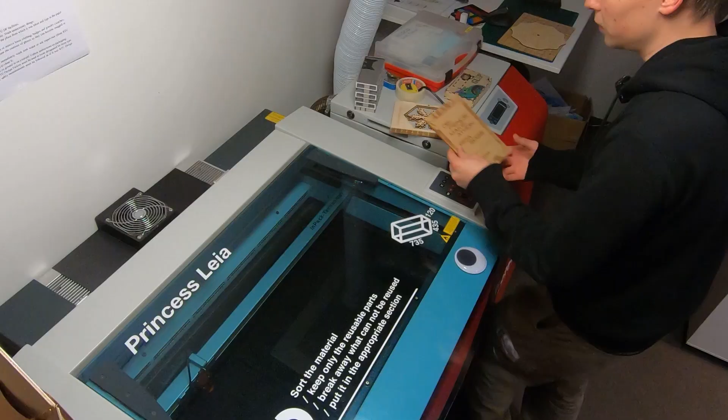So, what can you laser cut with this laser cutter? You can cut a square, then engrave something on it, or cut something out like this, or even make living hinges like this, or make a battle bot. This is my one, I made this one.

The art as well, that's not engraved, that's just paint. But yeah, you can make battle bots that can be smashed around and see, still perfectly all right.

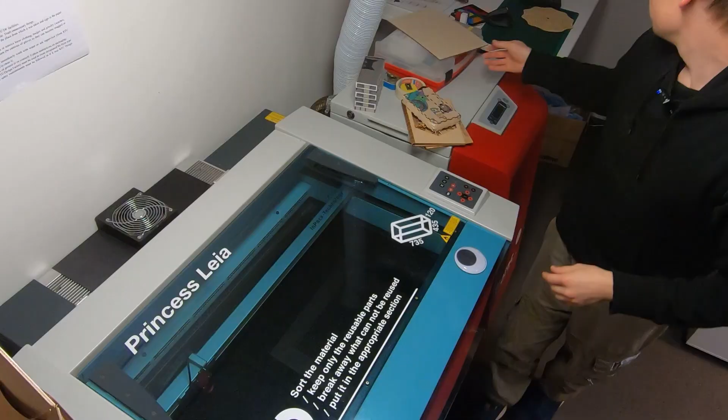And you can go even further, you can make puzzles over here. This one is glued together with tape on the back, like this. Then we can also make not only living hinges, but hinges by themselves. This is supposed to be a tree, a pine tree, it has a star.

And you can even make bigger things with the laser cutter, like one of our interns has done. He has made a Minecraft pig. I crashed it, but there, see? Minecraft pig, like this. It's quite big, quite heavy, but it's made from the same stuff that we use here, 6mm plywood. This thing is made from the same thing, only bigger sheets. But yeah, it can be opened, can be fixed, has wheels. Currently it's not turned on, otherwise I'm gonna crash way worse. Let's put it back down over here.

But yeah, you can make big things, small things, very precise things with the laser cutter. So this is going to be a crash course on how to use it. Not abuse it, how to use it.

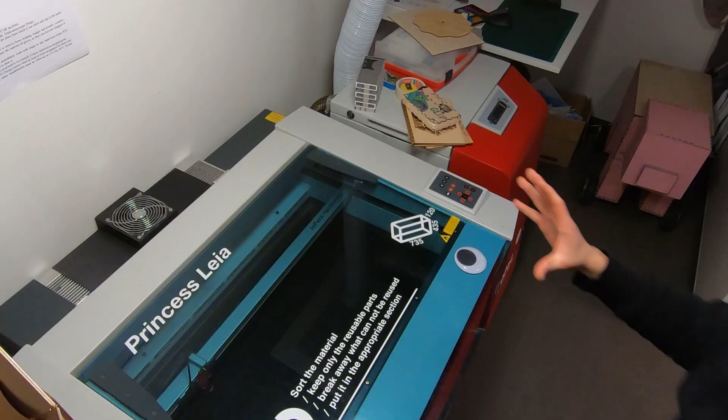So why should you be choosing the laser cutter instead of a 3D printer? This thing prints plastic, this thing can cut plastic as well. But what is better than a 3D printer is that 3D printers are slow, very slow. When you move the bed, when it prints layer by layer, it is slow. The laser cutter is fast. For example, if I would be cutting out this small box, it would take 3-4 hours, okay, maybe on faster printers maybe 2 hours to print. But over here in the laser cutter, it only takes a few minutes.

This one, to be exact, 4 minutes of cutting. Plywood, you cut it, and then I think this can be also, yeah, this can be somehow glued. It's glued? No, it's good, can be disassembled like this. So it's basically plywood cut into pieces, glued together, and it's quite fine.

It's very nice. So a laser cutter can also cut small things, like tiny pieces of plastic over here, if you look at them, same as this. You can cut very precise things, for example these snowflakes are supposed to be broken off. See, already broken off the piece, but it's still held in place.

So laser cutters, in a nutshell, are much faster than anything, but limited to 2D surfaces. It can engrave some 3D surfaces, for example we have a rotary attachment to rotate mugs and engrave them. If you cannot really cut anything like that, we cannot cut a mug, it's made out of porcelain or some clay, it cannot be cut. But it can be engraved.

But the laser cutter is mostly for 2D things. Later you can assemble them into 3D things. There are many things that are assembled layer by layer and then joined together. You can have some 3D things like this, same as this tree.

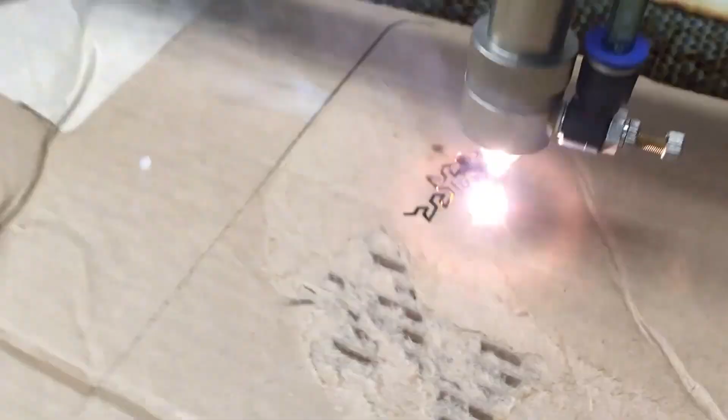Paper and cardboard - in most common cases, students will bring their own paper and cardboard. They come in different colors, sizes, and thicknesses. Currently almost all kinds of cardboard have their settings already set up on the laser cutter, but it's always recommended to cut out a small piece to test if the material cuts through evenly. Both paper and cardboard cut beautifully, but they are highly flammable, so use low power and keep a close eye on it to avoid flare-ups. Corrugated cardboard can catch fire in under 6 seconds because of the great airflow that the corrugated layers allow, and in rare cases the cardboard can burn from inside out, creating a big dark spot, so be really careful when cutting cardboard materials.

Cork, the same material used for corks in bottles - they also come in sheets, and it cuts nicely with the laser. It's natural, safe, and gives great results for coasters or inlays, but the sheets may be badly warped, so be sure to tape them down as necessary. Organic leathers: real, untreated leather is safe to cut. Just make sure it's vegetable tanned, not chrome tanned or synthetic - that stuff releases nasty chemicals. When leather is cut it also smells like burnt meat, so it's not suggested to be cut in large quantities.

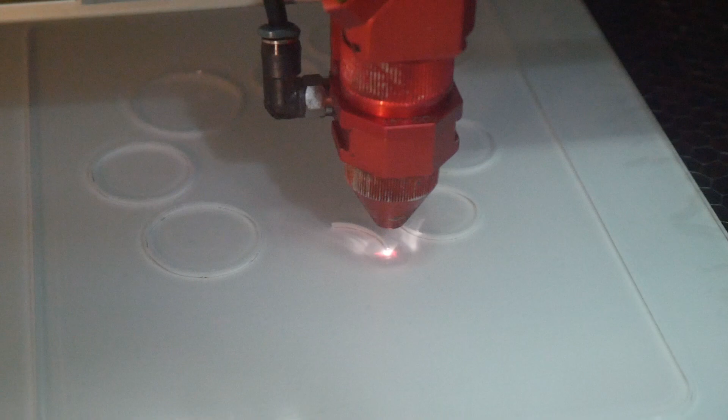Acrylic, or so-called plexiglass - people call it different things, but you have to remember the real name: polymethyl methacrylate, in short form PMMA. This material is also stocked in the lab, ranging in sizes from 2, 3, 4, 5, 6, and 8 millimeters. Sometimes you might even find 10 or 12 millimeter ones. Plexiglass, remember PMMA, is also one of the best plastics for laser cutting. It cuts very cleanly, polishes the edges as it goes, and smells a bit like sweet plastic. Avoid other plastics that look similar though - they might not be safe.

Some natural fabrics are also laser cuttable - for example silk, cotton, felt, and wool are fine, just keep the power low to prevent charring. But synthetic fabrics like polyester or nylon can melt or give off toxic fumes - avoid those. And then polypropylene: it's one of the few plastics that is reasonably safe to cut. It tends to melt a bit, but it doesn't release toxic fumes like ABS or PVC. Other safe materials include wood veneer, MDF without exterior glue, natural rubber, and Delrin. These are generally fine in small amounts, but ventilation is always important.

Now we have reached the do-not-cut material list. Exterior plywood - as shown in previous clips, exterior plywood burns and doesn't even cut through. It contains weatherproof glues and resins that give off toxic gases. Don't risk it. This is one of the most misunderstood materials by the students - be aware of this, and you must tell them apart. If the student says the material has been brought from Home Depot or some other mysterious place, it's probably non-cuttable exterior plywood.

PVC, or polyvinyl chloride - absolutely not cuttable. As its name suggests, it contains chloride, which releases chlorine gas when cut. This gas is corrosive, toxic, and destroys the laser cutter's optics and electronics, and your lungs. This material should never ever be cut.

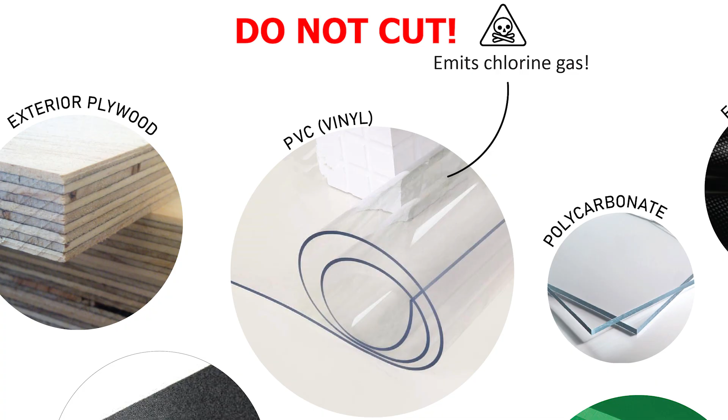Polycarbonate, or PC. It looks like acrylic or plexiglass, but behaves totally different. It burns, discolors, and releases toxic fumes. It also barely cuts through. It is one of the most misunderstood materials by students. Always check the origin and markings on material brought by students. If you're not sure, suggest using our material, and be sure to ask the staff's opinion, or tell the student that the material cannot be cut.

Epoxies, fiberglass, and carbon fiber composites - these materials are resin-based and full of glass or carbon fibers. Cutting these will release fine dust and extremely toxic fumes. Never use them in the laser.

ABS - you probably know what's ABS, Legos are made out of it. In long form, acrylonitrile butadiene styrene, this is another no-go material. It melts instead of vaporizing and outgasses hydrogen cyanide, which is highly poisonous. Never cut this material.

HDPE, high-density polyethylene. This material just melts into a gooey mess and can catch fire. It is not worth the trouble.

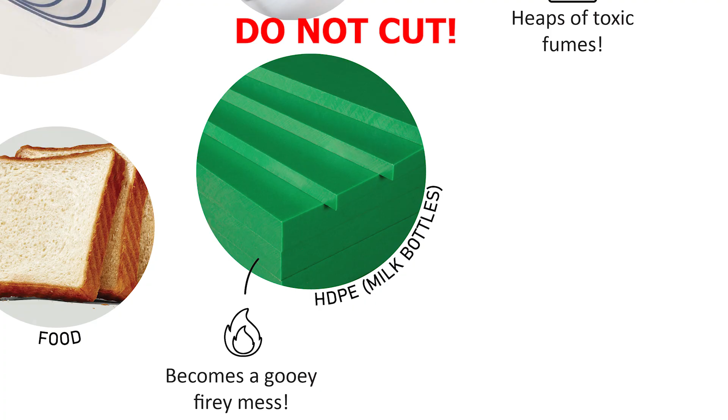Food - even though food is non-toxic, do not cut food. A laser cutter is not meant to have food even near it.

Vinyls and fake leathers - they usually contain PVC, meaning chlorine gas again. Dangerous for you and the laser cutter.

Painted or coated woods and metals - the coating can contain lead, chromium, or other toxic compounds that become airborne when burned. Yes, the filter filters almost everything out, but what remains on the material as dust stays there, so there's still a possibility of inhalation. It's not worth the risk.

Teflon, or PTFE, and other fluoropolymers - when these materials are cut, they release toxic fluorine compounds. They are super dangerous.

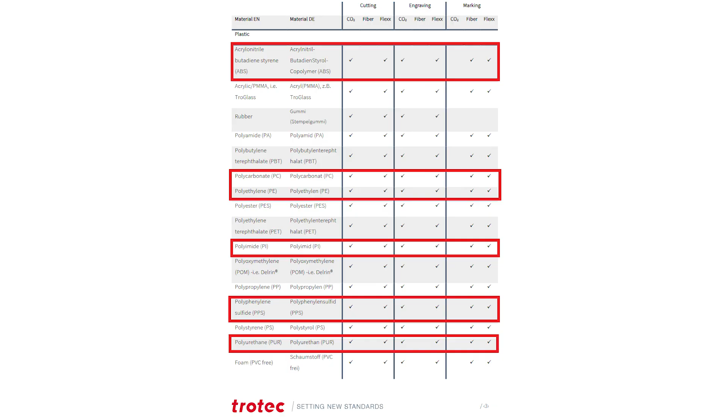A quick rule of thumb: if you're not sure what the material is made out of, do not cut it. Always check the manufacturer's datasheet, and even then, don't believe that it should be cut. For example, when making this guide, I found out that the laser cutter manufacturer's website advertises that the laser cutter can cut some of these dangerous materials.

But in real life, not only will they poison you, they will also corrode the metal inside the laser cutter. When you're not sure and being pushed by students to test out a material, be sure to ask the lab staff for their opinion, or don't cut the material. Nothing bad happens when you don't cut the material, so suggest using one of our materials kept in stock. Yes, students might get angry, because sometimes the store clerk where they bought the material tells them it can be cut. Yes, of course it can be cut, but in reality it will poison not only you, but the people around you and the students themselves.

So always be aware of the materials that you or others are cutting. Alright, remember to stay safe, and let's move on to how to actually operate the machine.

The laser cutter assembly consists of four main things: the pre-filter, which we are currently not using, the laser assembly itself, the actual filter, which we are using, and the computer system.

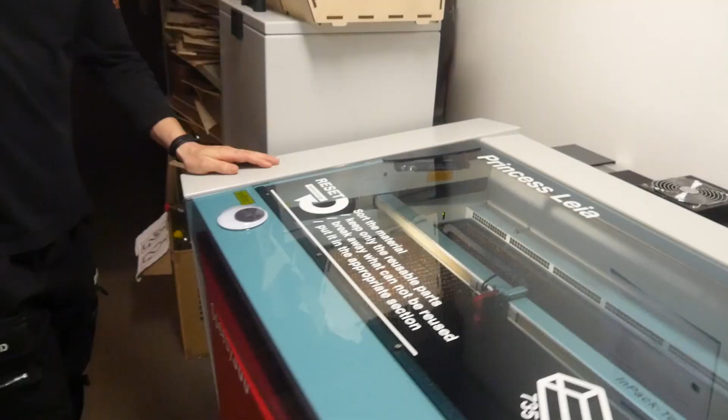To turn on the laser cutting system, first find the power button, located on the back of the laser. You don't have to reach very far, it's right over here, can you see it? Yes. To turn it on, just flip the switch. The laser cutting assembly will turn on and calibrate itself - it levels the bed, and then levels the laser gantry itself.

After a few beeps, as you can hear, the laser cutter is ready to start working. It has calibrated all the zero positions of the bed and the head. The work can be started.

When the laser cutter is turned on, you can manually control it by the physical control menu found here. There are many buttons, I'll explain each one of them.

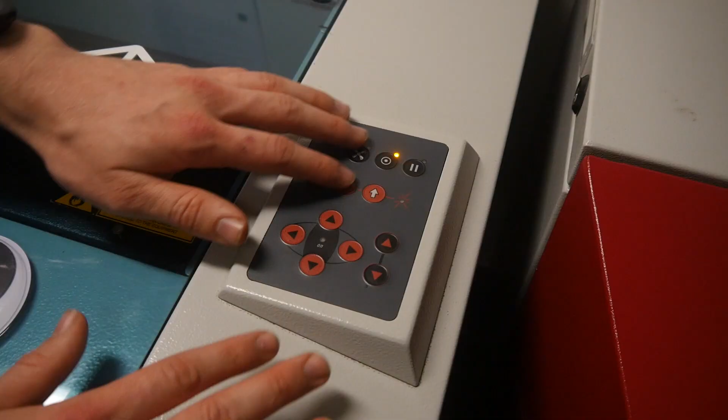Over here, the main button that's currently yellow controls the wake and sleep state of the laser. Currently the button is on, meaning the laser is in sleep mode. If I press it, it wakes up the laser, and when I press it again, it puts the laser back to sleep. If this button is turned on, all of the other controls do not work because the laser is in sleep state. Over here, this button is a manual button for the filter.

If you press it, the filter is going to wake up. If I press it manually, the filter wakes up, and if I press it again, the filter goes back to sleep. We don't really use this button because the filter automatically turns on when you launch the job. It's only here to check the filter manually if you want to.

To the right, you can see the pause button. This button is used to pause the job. If you're doing something and need to adjust something, press the pause button and the job will pause. Then you can adjust anything you want, and when you press it again, it will continue the job.

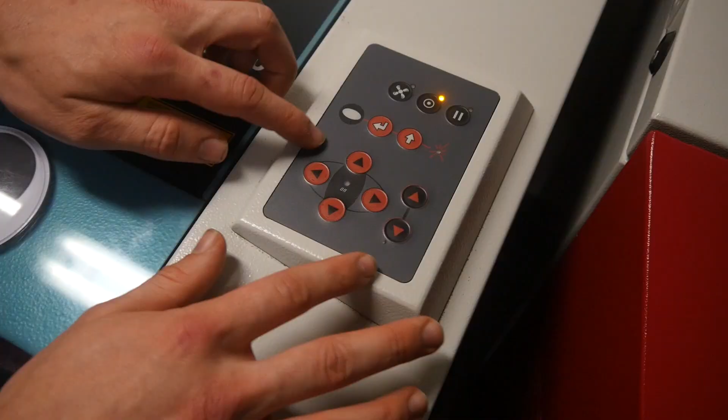Over here, on the lower side, you can see the main control buttons for the laser assembly itself, to manually move it. If I wake up the laser, you can see these red buttons control the laser head. I'm going to move it down, to the right, back up. These buttons move the laser head.

The buttons on the side control the bed. This button, if you press it, the bed goes up. If you press the down button, the laser bed will go down. Currently I'm just moving it up. As you can see, it's slowly moving up.

I'm going to move the laser here. So, back to sleep, back to sleep. See, the laser goes back to sleep.

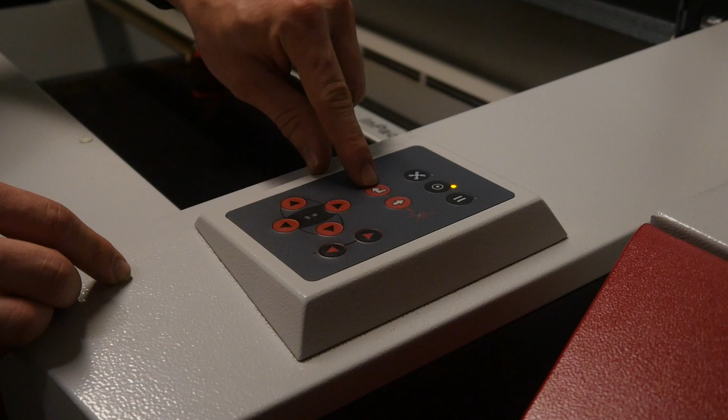These buttons are the shortcut buttons. This button represents the enter button. If you press this button, it will launch the job that is on the computer. We don't use this button because we always make sure we launch the job from the computer, but this button can be used as a repeat button. For example, if a job doesn't cut through it all, you can use this button to launch the job a second time.

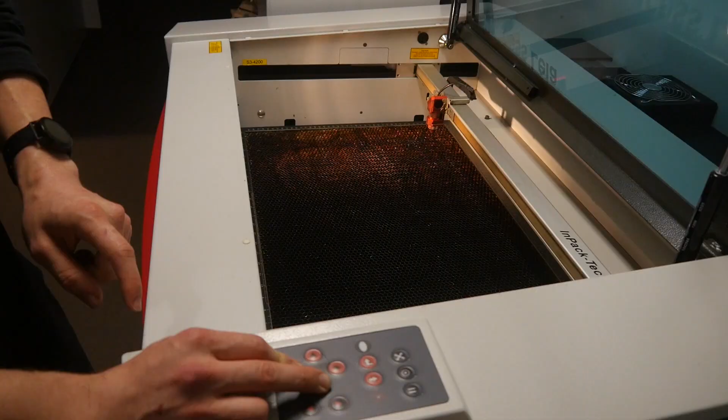This button represents the arrow up, and it works like a shift button. If you press this button, the laser assembly will go really fast to whichever side button you have pressed. For example, I'm going to hold the shift button and move it to the side. See? It's really fast. If I move it manually, it's quite slow.

For example, if I'd like to take the laser head from here to that corner, and I press these two buttons together, see, it's really quite slow. Let's go back. For example, if I want to go really fast and don't want to hold these buttons for a long time, I press the shift button, then press these buttons. As you can see, the laser goes back to place.

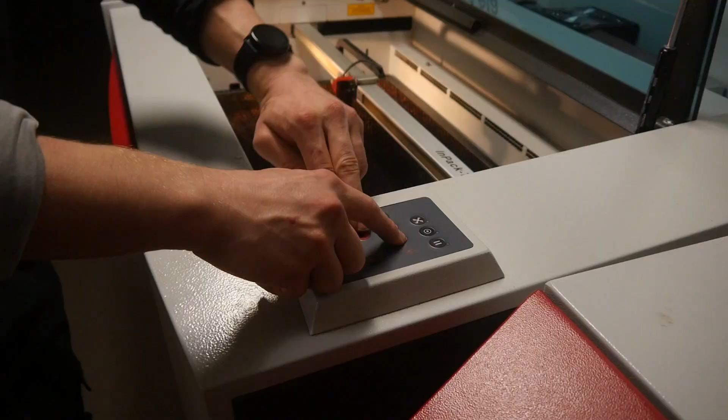I can do the same thing for this side. It goes like this, and then it goes back. The buttons can be pressed simultaneously to move it diagonally, but you can also use them one by one to control the laser assembly. Let's send it back to its place. And now it's back to sleep.

This is the laser control menu.

Before starting your job with the laser cutter, you must obligatorily check three things: the laser lens, the laser mirror, and the laser filter. Over here, I'm going to turn on the laser, move the head to the middle position, and turn it off.

Over here you can see the laser head assembly. Here is housed the mirror. Here is housed the lens. Here is housed the pressurized air that blows down this nozzle to blow away the smoke. And here is the groove for the calibration tool. That's the whole laser head.

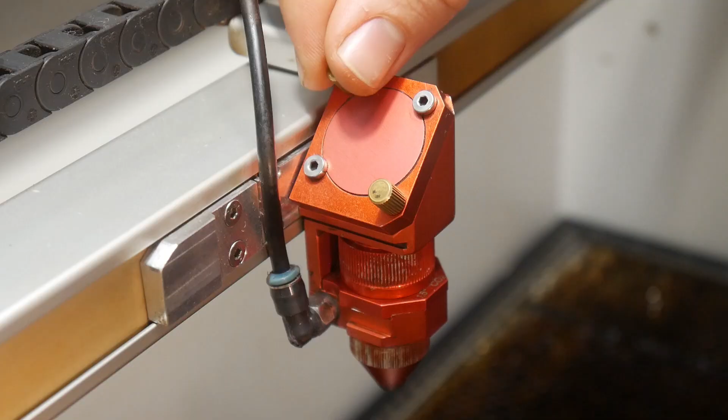To remove the mirror itself, first you have to remove these two screws. You have to unscrew them anti-clockwise. Do not lose these screws. Store them in a safe place.

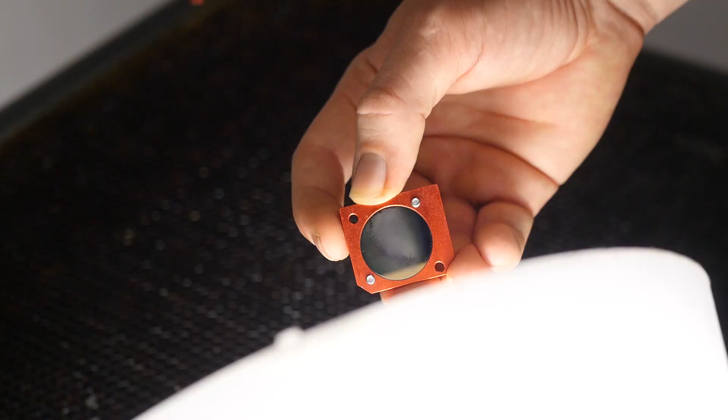Over here, be really careful not to drop the laser mirror. You can just take it out once the screws are unscrewed. I'm going to place it here. Over here, if you can see, it's a little bit cloudy. I'm going to place it here.

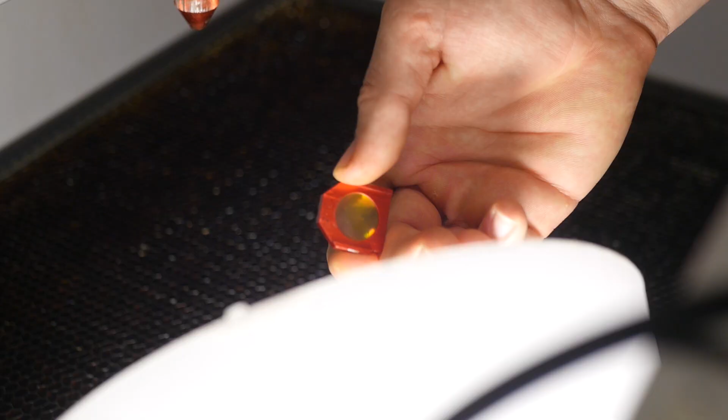Then, over here is housed the laser lens. To unscrew it, there's a big screw over here, and it's unscrewed anti-clockwise. So unscrew it, and then it can be slid out. If you can see, it's also pretty dirty, very cloudy, and not see-through. You can see the cloudiness on the lens, like here.

Place them over here. To clean the laser lens and the mirror, you have to use this toolbox, stored over here on the laser filter. Sometimes it's in a different spot, but we store it here on the laser filter to make sure it's in one place, and we all know it's over here.

So you'll need two things from this box: lens tissues and lens cleaner liquid over here. First, remove the lens tissues from the protective bag so no dust gets in there.

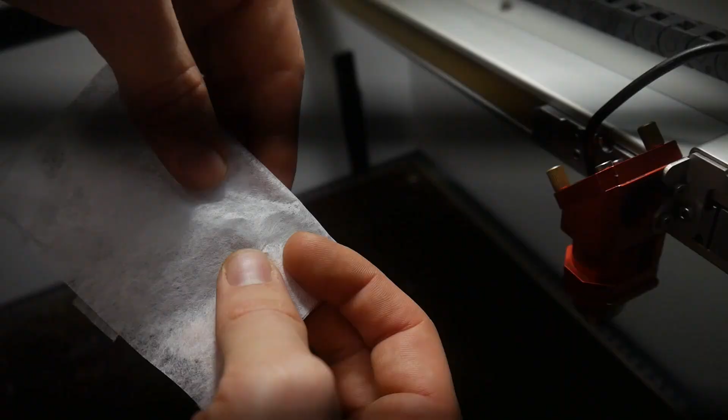Here are the lens tissues and the lens cleaner. First, you have to prepare the lens tissues. Open the package and tear off one piece of lens tissue. Then fold it 3 times: 1, 2, and 3. It has been folded 3 times.

Using the lens cleaner liquid, put 2 drops on the mirror, 2 drops on the mirror. Close the lid, put it away, and then swirl it around. You can see the liquid swirling around, very nice.

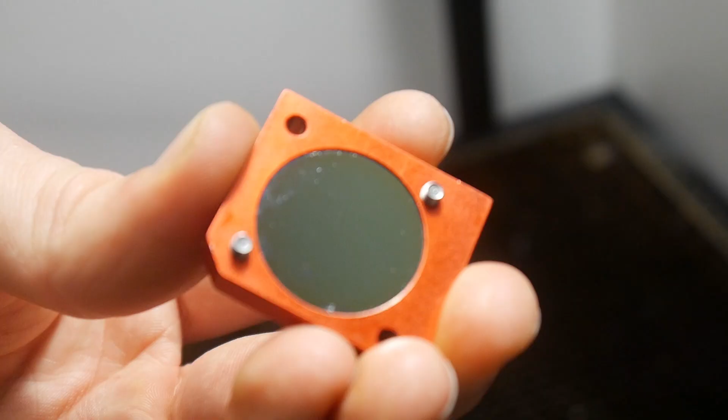Then, taking the tissue, put it on top, rotate the whole mirror 1 full rotation, and press down and wipe away. As you can see, the liquid quickly evaporates and now it's very clean. Looking here, the mirror is like a mirror, no cloudiness in there. There are a few scratches, but that's just fine. You have to make sure there is no cloudy film on it. Now it's very clean.

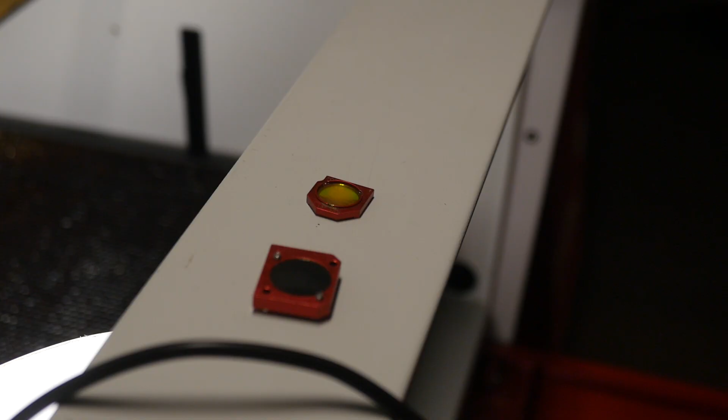Same with the lens, but the lens has 2 sides. Always, when you have used the lens tissue, throw it away. We do not reuse them. So each side will get a new tissue.

So again, taking the tissue, folding it 1, 2, 3 times, taking the lens cleaner, 2 drops on the lens, closing it, and again be really careful not to drop it. Then press it on, rotate it 1 full rotation, pressing a little bit, and wipe away. As you can see, the lens top is now quite clean. But we still have the other side, which is again cloudy.

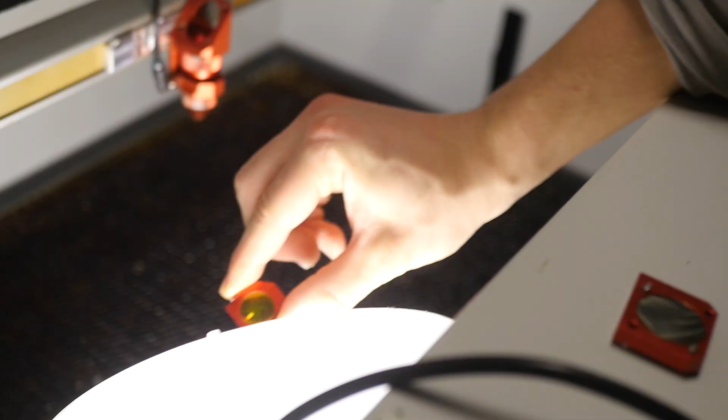So again, throw this away, use a new sheet, tear off a new sheet, fold it 3 times: 1, 2, 3. Again, 2 drops on the other side, 1, 2. Close it. Then really carefully swirl it around so the liquid gets in all places. Put it on, rotate it, pressing it slightly, and then wipe slowly away. As you can see, it is now very, very clean.

So both sides, you have to make sure that the lens and the mirror are clean. So let's put them back the same way.

As you can see, on the lens it's written 'top' with an arrow indicating this way, and you can see the corners are cut off here, same as on here. You can put it in, slide it in, make sure not to touch the lens itself, and slide it in, then this can be rotated clockwise to lock it into place.

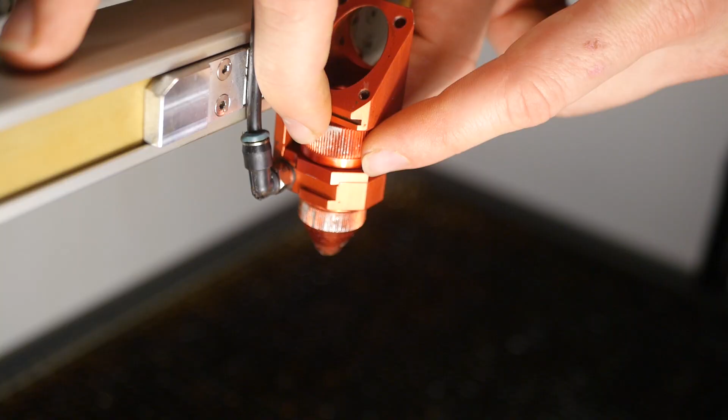Make sure not to over tighten. You can already see some people have used pliers to open it because someone had over tightened it. You have to just tighten it finger tight, so you can easily untighten it. But not too easy, you have to apply a little bit of force to untighten it, so apply also a little bit of force to tighten it. If you over tighten it, it will be impossible to remove. Please do not do that.

To check if it's tightened, put your finger and move it roughly. See, I opened it just with 1 finger, so it has to be put a little bit tighter. Now it's a little bit tighter, and now it's impossible to open with 1 finger. But if I use 2 fingers, I can open it quite easily. So just finger tight, make sure that it's not going to come off. Because if you tighten it a little bit loosely, this whole thing is going to be wiggly and can accidentally come out, and it will not give you a perfect result. So finger tight, same with the lens.

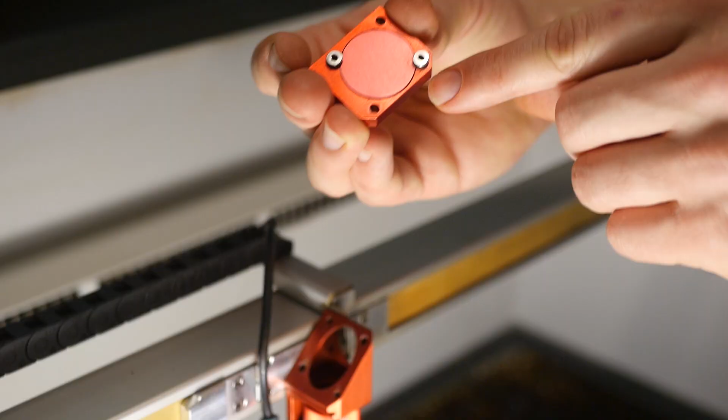Now same with the mirror. Be really careful, you don't have to slide this, you have to put it on. There's no written 'top', but the mirror goes down, and then you have to look at these 2 corners that are cut off. These are very sharp, but they're cut off. Same over here, also cut off corner, and then you can just put it on.

Remember, take the screws, screw in each place, and then you just tighten the screws. Again, make sure to do the finger test. If you cannot screw it with 1 finger, then it is good. Over here I'm going to untighten, see, with 1 finger putting quite pressure I can move it. So this is bad. You have to make sure they're finger tight and also can be opened, because do not over tighten these. So hand tighten, it will be perfect. If these are not tight, the whole mirror is going to shake and make a lot of artifacts on the laser cutting surface itself.

Okay, so the lens are cleaned. Let's go to the next thing, the filter, the third thing that has to be checked. Remember, after cleaning the lens, place the lens tissues back into the protective bag to protect it from dust and other debris.

Make sure that the lens cleaner is tightened to not spill accidentally in the box. After done, close the box and discard the used tissues.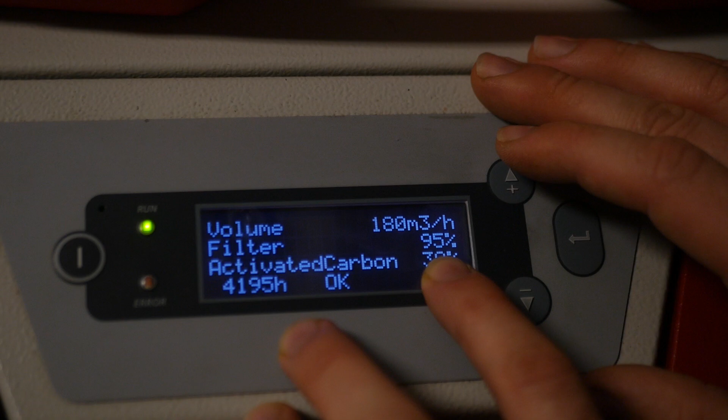After those two things are done, let's get to the third thing, checking the filter. If you go back to the laser control, we press the filter button and the filter turns on, and we can see the filter condition. If it goes up, see it's going up, going to about 93, 94%. It's even going up, and now it's going low, decreasing the speed. The bigger the percentage, the fuller the filter is. This filter has to be replaced quite early now because it's quite full.

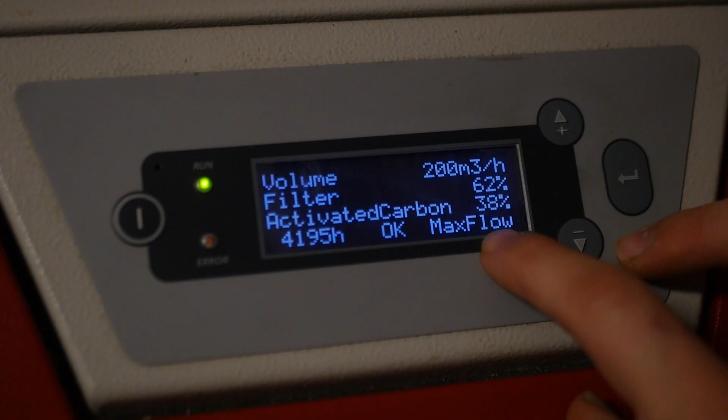If it's going to 100%, if you increase the airspeed like this, it might show 100%. That means the filter has to be changed. But now the filter is doing quite okay, so you just have to check the filter.

Please do not use these buttons, they're not used to mess with the filter. These plus and minus just change the air throughput of the filter itself. We don't really use them, we just have to set it at 100%, and it's just fine. We don't have to tune it unless something is wrong, then I'm going to mess around with these.

So, turning on the filter. The filter is okay, it's not beeping. The lenses are clean. We can get to the program.

So the laser has been turned on, the lenses, the mirror, and the filter have been checked, everything is in perfect condition. Now we have to turn on the computer.

The computer is usually in sleep mode, so you can just mess around with the keyboard and it will turn on. In this case, that doesn't turn it on, so it has been shut down. To turn on the computer, the power button can be found on the upper right corner here. There's a button hidden over here. Pressing the button will turn on the computer. Let's wait until the computer turns on.

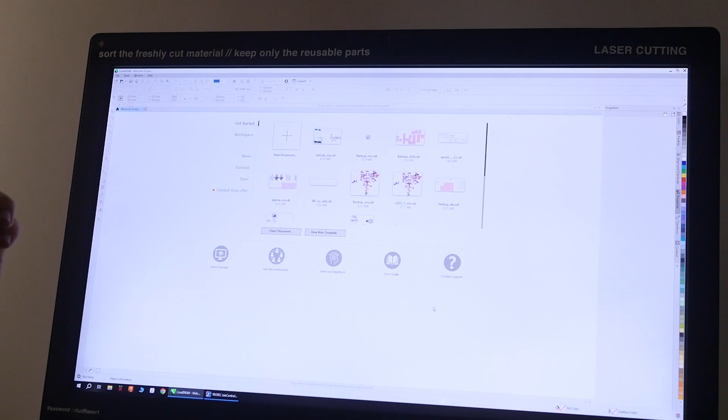Okay, see the laser bed. So the laser sizes can be found over here, we have printed them on the laser. Over here it's written 735 by 435, but in reality, usually you have to do it 730. There's a 5 millimeter difference.

CorelDraw and JobControl. When the CorelDraw program is open, on the Welcome screen under the Get Started tab, you can open an existing document or create a completely new blank one. For our laser cutter, the correct blank document settings are: primary color mode set to RGB, page dimensions left the same as the laser cutter's maximum bed size, and remember to keep the units in millimeters.

You can also do this by going to the top and pressing File, New Document, or Open and selecting your already existing document. If you're working on something important, remember to give your project a proper name and save it somewhere safe so nobody accidentally deletes it. Avoid saving files on the desktop, since it's frequently cleaned and things may disappear. Either create your own folder in the Documents tab, or save it to a flash drive, or use the cloud.

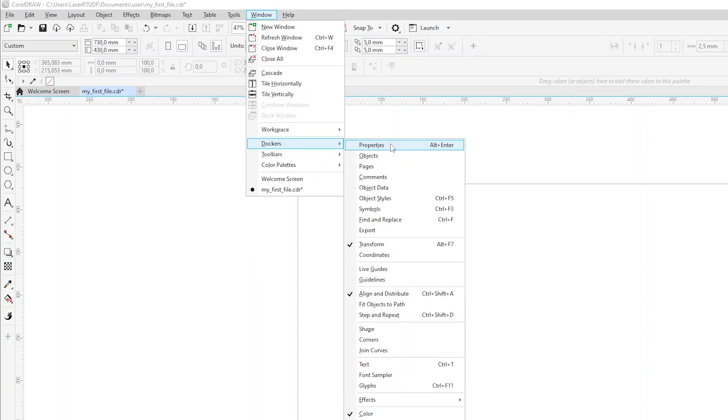On the top bar, you'll find options and properties for the current selected tool or object. On the right, you'll see various panels called dockers. The main one you're going to be using is Properties, where you'll find options for line color, line width, fill color, and texture. If any of the docker panels gets accidentally closed, you can reopen it from the top by pressing Window, Dockers, and then choosing the docker that was missing.

Working with objects. There are three types of objects in CorelDraw: vectors, images/bitmaps, and text or annotations. Let's start with vectors. You might be asking yourself, why vectors? Well, for any laser cutter, vectors are really important because they act as a coordinate system for the laser cutter, defining paths with exact units so the software and physical cuts match perfectly in size and accuracy.

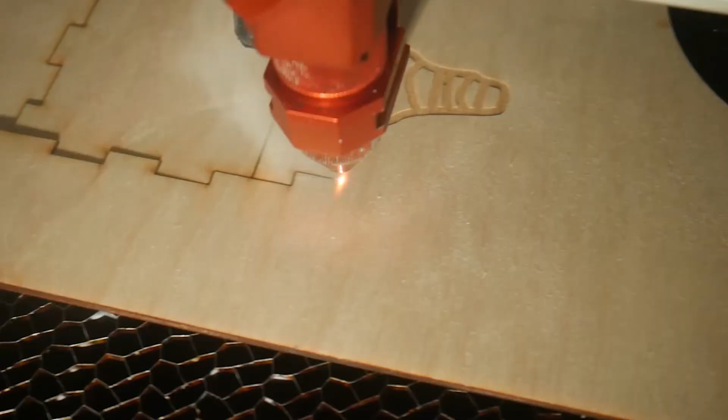Vector graphics are made up of points, lines, and curves defined by mathematical formulas. They can be scaled infinitely without losing quality. Most importantly, the laser cutter reads the vector paths directly. They tell it exactly what shapes and lines to cut out or engrave.

Drawing basic shapes. To start drawing, enable the freehand tool and draw by clicking and dragging. You can draw squiggly lines by holding down the left mouse button, and straight lines by clicking in different locations. You can also combine squiggly and straight lines.

Let's try drawing a light bulb. You can see that this tool leaves all of the detail and mistakes intact, and also that the line ends can be connected to different lines. Here's a very ugly light bulb.

The polyline tool lets you drop straight segments with single clicks, or draw freehand by holding down the click. Double-click or close the shape to finish your drawing.

For arcs, use the 3-point curve tool. Click and drag to define the base, then click again to set the arc.

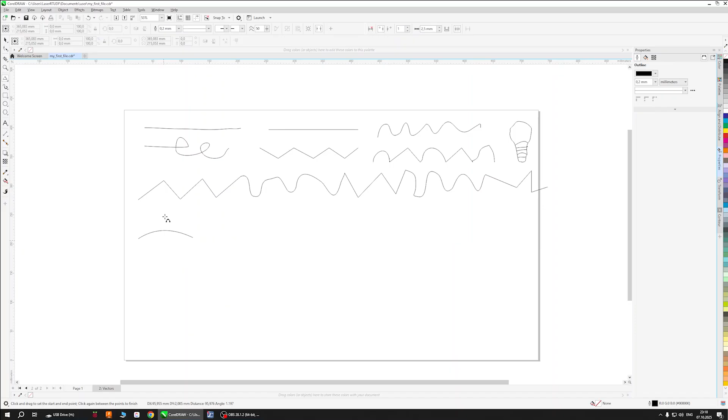For smoother curves, use the Bezier, Pen, or B-spline tools. With Bezier or Pen, click for straight lines, or click and hold to curve the line using the tangent handles. With B-spline, click to place the curve points, and double-click to finish.

To draw regular shapes like rectangles, circles, or polygons, use the tools between rectangle and polygon on the toolbar. You can draw uneven rectangles and ovals, but if you hold the Control button on the keyboard, you can draw perfect squares and circles.

For polygons and other shapes, you can set the number of edges you want in the Objects option menu found on the top. You can also use common shapes to select from preset forms.

The Artistic Media tool allows you to draw freeform sketches and adjust the stroke style, width, and other properties. Let's try to draw a cat and adjust some options. Seems like it's a little bit angry about my drawing skills.

You can also try Live Sketch or Smart Drawings to automatically smooth out your strokes.

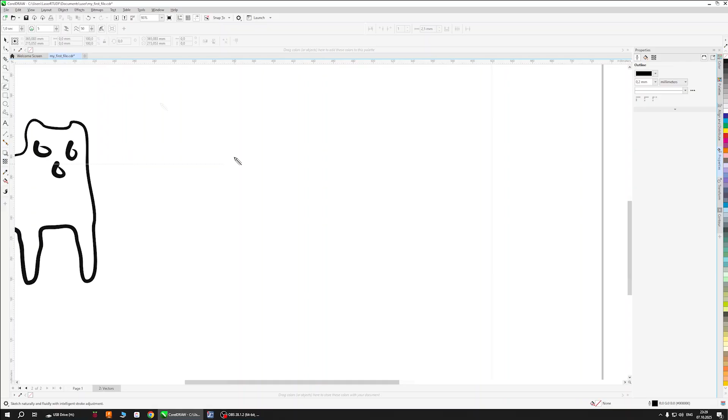Managing your drawings. To move or scale shapes, use the Pick tool and click on any object. You can drag to move, or use the black corner nodes to scale freely or enter exact values in the object size fields. You can also lock the aspect ratio to scale evenly or unlock to stretch in one dimension.

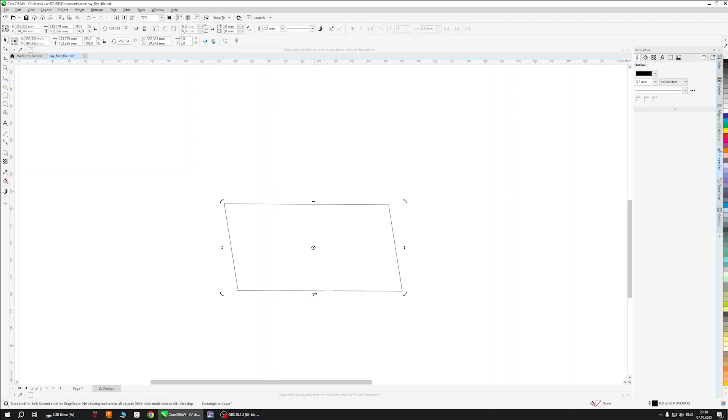Clicking on the same object again switches to rotate and skew mode. You can rotate using the corner handles or type an angle in the rotation box. If you want the object to be skewed, use the skew handles and drag them to skew the object. To rotate around a different point, drag the center crosshair to where you want the rotation to pivot.

You can also mirror the object horizontally or vertically. Using the Shape tool, you can smooth out the edges of your shape by dragging the corner nodes, or indent or bevel them using the top menu.

Drawing aids. CorelDraw provides rulers, grids, and guidelines to help you align different objects. Drag from the horizontal or the vertical ruler to drop a new guideline. Use the mouse wheel to zoom in and out.

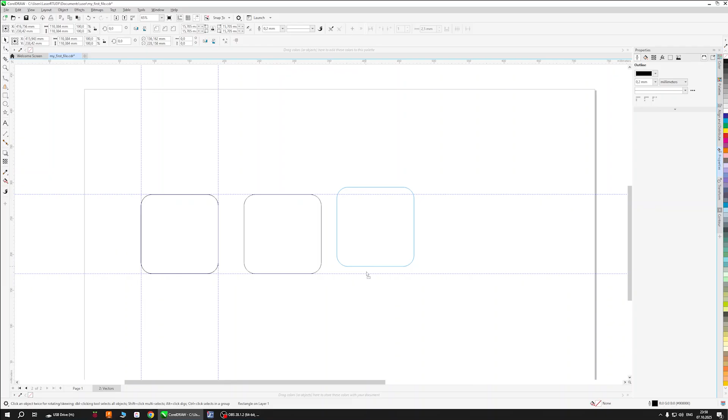You can also enable snapping from the Snap to menu. Snap to grid, guides, nodes, edges, midpoints, intersections, or centers.

A great way to practice vectors is to create a three-dimensional box with basic connections. You'll have to think how everything will fit together in real life when the thickness of the material is introduced. Let's try to draw this example, and in the process we'll learn some handy tricks with shapes.

With multiple different shapes and lines, you can combine them into a continuous line with the tools found at the top bar. You can see that the Weld tool combines the shape with the outer outline, but using the Trim tool I get the result that I was looking for.

I highly suggest testing the other tools to get the feel how each one can aid your drawing experience. Here I'll try to make the other linking side of the box piece.

Be sure to test out your drawings by snapping them together and looking for sides that may not fit or disrupt the connections. We can see that one of the sides will have to be modified to fit together.

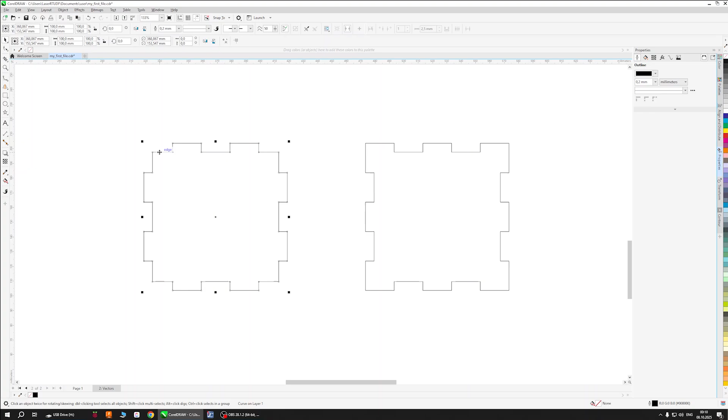To edit curves with the Shape tool, you'll have to check if the object is converted to curves. Simply right-click on the object and select the Convert to Curves option.

Now I will attempt to substitute one side of the wall to the second one, and see if the box fits together now. Seems like there's some more details to improve.

You can also use the Combine, Group, and Ungroup tools under the Object tab or with shortcuts. And of course, you can use Ctrl+Z to undo something. Now it's looking way better.

Let's try to copy and paste multiple ones so we can see how the box looks from all sides. I will also remove the top pieces to make a flush top. Alright, seems like all sides will fit nicely together.

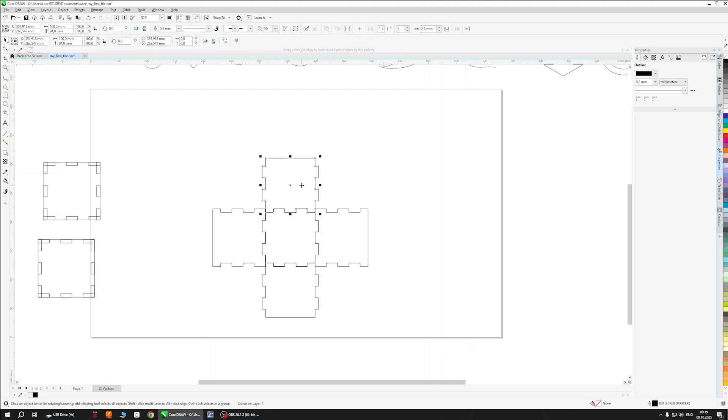Now, what's left is to prepare it for the laser cutter. Editing properties: to prepare your design for the laser cutter, open the Properties docker.

Under the Outline tab, you can set Line color to full red, in RGB values the red option 255, to set a true cut in the material.

Remember to set the line width option to hairline, otherwise the laser will engrave instead of cutting. Very important, the laser only reads pure RGB values. If you have any mixed or partial colors, it will be treated as grayscale and engraved instead of cutting.

Under the fill, you can apply colors, gradients, or patterns, but remember that it will be just engraved as an area.

Working with images. Images and bitmaps are made out of pixels and lose quality when scaled too much.

To import one, go to File, Import, and select your file, and click and drag to place it. You can move, resize, or rotate it with the Pick tool, and crop it or reshape it with the Shape tool.

You can also use the standard crop tool to crop the image normally. To convert an image into vectors, use the Trace Bitmap option.

This creates vector outlines based on the image. Simplify to as few colors as possible, ideally black and white.

You can also adjust the detail of the image, smoothing, corner smoothness, and some other options.

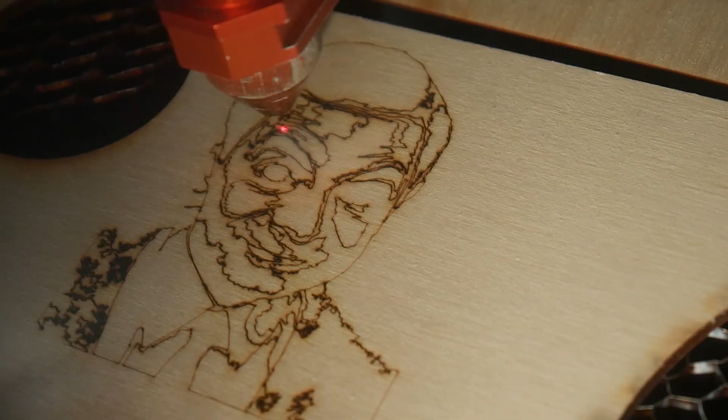Just remember, if you're surface cutting multiple lines together, or there are double lines that overlap each other, you can accidentally almost cut through the material.

The easiest thing to do is to take black and white images and then convert them to vectors. This will turn the low quality raster image into vectors and you can laser cut them out really easily.

Now let's try to recreate this black and white Mr. Bean. As previously mentioned, you should aim for the least amount of colors as possible, perfectly black and white. But in this case, I'm going to try to use some of the gray tones and then later delete them.

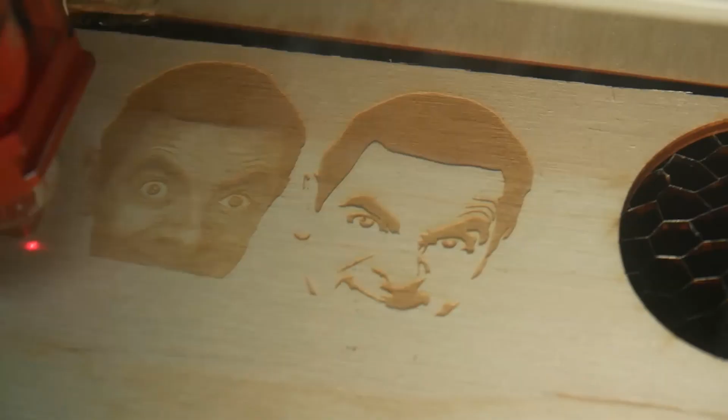Use the Text tool to create text boxes by clicking and dragging. If your text exceeds the box, the outline will turn red. Just resize the box to fix it. You can move, rotate, or skew text using the Pick tool.

Edit font, size, and color from the top bar in the Properties panel. To change text fill, background, or outline color, remember to have your text selected.

Be sure to test out all the things in the text options. There might be some things that might come in handy later. For example, text positioning, text fill type, text organization, all the possible sizes and styles, and of course, the color and the outline of the text.

You can also turn the text into curves using the right-click menu. Also, if you get annoyed by the text outer box, you can disable it by converting the text to artistic text.

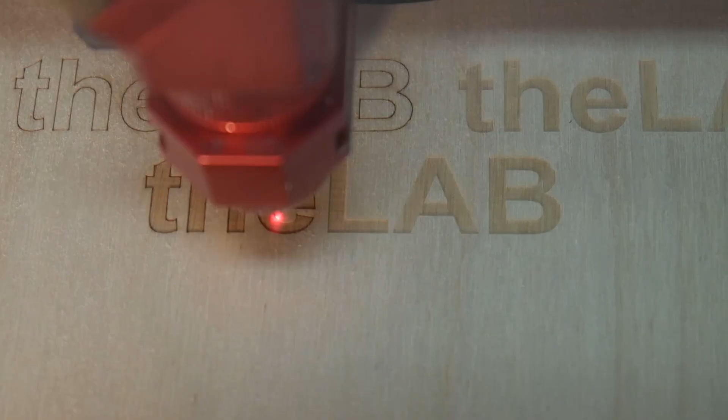Now let's look at some laser cutting examples. Here we can see the standard text being engraved with the black fill, and here we can see the surface cut with the blue line. You can also combine these two methods to increase the visibility of the text. Of course, nobody is keeping you away from cutting out the text, but the results may vary because the inner parts of the text may fall out.

Opening and editing files. Now that you know the basics, let's open a test file and prepare it for laser cutting. Simply go to File, Open, and select your document, or in the File Explorer, right-click on your file and choose Open With and select CorelDraw.

The supported formats include .pdf, .cdr, .svg, .dxf, and .dwg files. When importing, for PDF files, select curves. Or if you're opening a DXF file, check the scale settings carefully, because the imported size can vary. After importing, measure the key parts to confirm the correct scale.

For cutting, remember to set the line thickness to hairline and make sure that the cut lines are perfect RGB red color. Remember, if you've set all of the outlines to red, they're going to cut out, even text. So in this case, I've also selected the text accidentally. Let's fix it.

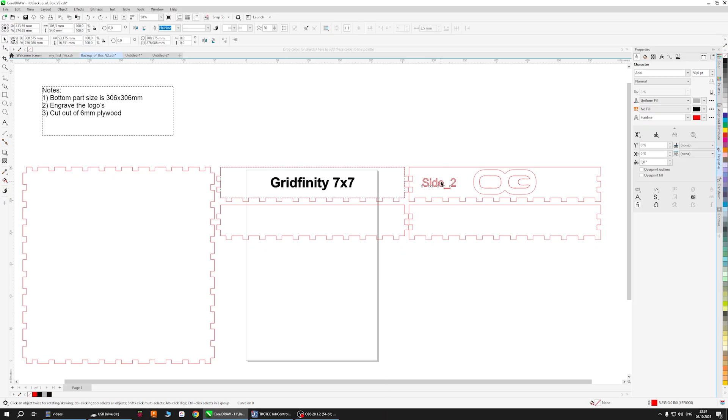If engraving lines are too thin, you can change them to the RGB blue color. For surface cuts, it will make the cutting faster and cleaner. Remember to check for duplicated lines. They look a little bit thicker than the other lines when zooming in and out.

If so, move the line slightly to see if another line is underneath. If so, delete the duplicate. Otherwise, the laser will cut the same line twice and burn the material.

If you're working with multiple parts or vectors, arrange them efficiently in one sheet if possible, leaving at least 1mm of spacing between the objects. Here are some examples. In the first example, you can see that someone tried to do it, but there's still big gaps between the objects, and in the second one, you can see that it's arranged very nicely. But if you look close enough, you will see that some of them overlap, so that's the no-no.

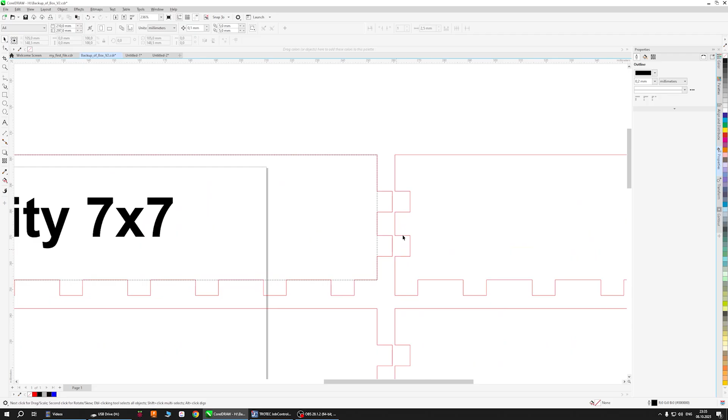But in our case, the parts are very big, so we're going to be using the scrap material. I strongly encourage for your projects to use scrap material. Otherwise, if using full sheets, we are going to create even more scraps. So let's reuse all the scraps that we can.

When everything looks correct, remember to double check. And you're ready to send the job to the JobControl program. Select the parts that you want to be cut or engraved, then go to File, Print, or use the Ctrl+P shortcut. Print options, very important.

When the print window is open, you'll see a preview. If it looks cropped, don't panic. In print range, change it from current document to selection. Now it should only show the selected objects.

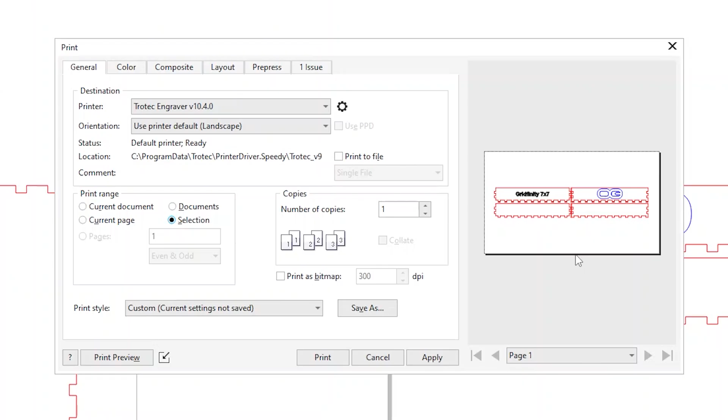Now click the gear icon to open the job settings. Make sure that these options are set correctly. The bed size should be 735 mm by 435 mm. And make sure that these two checkboxes are checked.

Sometimes they uncheck on their own, causing errors later. So remember to double check them. If they are not set correctly, uncheck the checkboxes, set the correct size, and press the JC button to save the value and open the job settings again to recheck the checkboxes. This is one of the weird kinks of the software that you have to be aware of.

When the values are checked and set correctly, we can move on to material settings. Under the Material Settings tab, choose the correct profile for your material. For all kinds of cardboard, you can use the Cardboard or the Paper tab. For plexiglass, use the Plastics tab.

For plywood, use the Wood tab. You will find all kinds of sizes for the specific material. Make sure to measure your material thickness and choose the appropriate setting. For this example, we are using 6mm plywood, so go to Wood and choose 6mm plywood. When the correct material settings are selected, press the JC button to confirm.

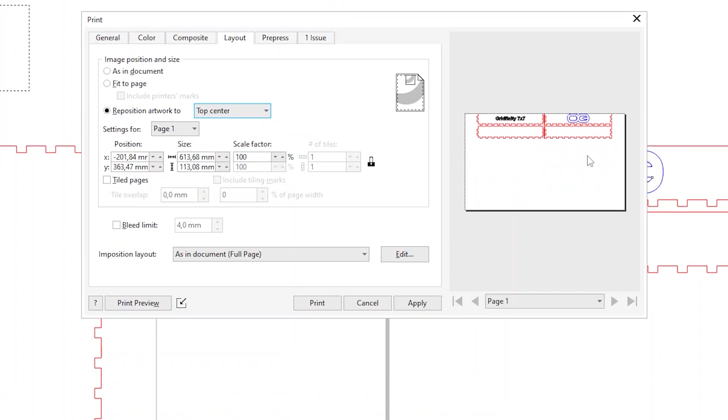This very rarely happens, but if your job is not positioned in the center of the page, you can go to Layout and choose the center of the page option. But this happens in very rare cases - I'm showing you this just so you know how to fix it if it happens.

When you're ready, you can press the print button. Do not worry, this only sends the job, it doesn't start cutting yet.

JobControl. After a short transfer, the job should appear in JobControl. If you're still in CorelDraw, the JobControl icon should start flashing orange. Open JobControl and your file should show up on the top of the list on the right side.

Before positioning your job, check that the laser cutter is connected to the software. On the lower right side, you'll see two indicators, ready and filter. If the two indicators are red, you should see a connect button in the shape of a USB. Press the connect button to initialize connecting. The laser should start beeping and a status window will open.

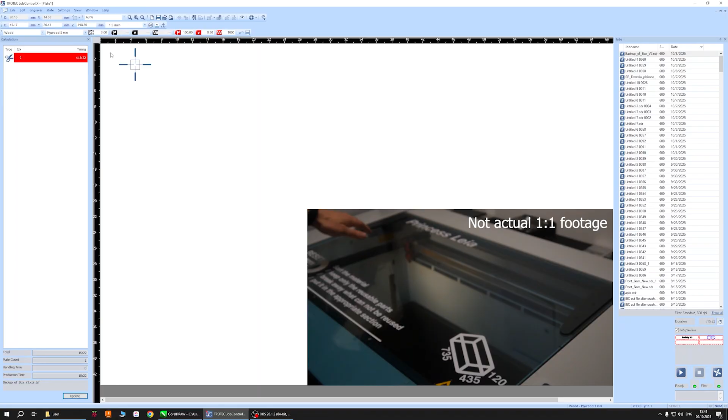Once the laser is connected, the connect button will turn to a play button, and the crosshair of the laser should appear on the screen. Usually the crosshair should appear on the top left corner, because the laser calibrated there. You can manually drag the laser head to the middle of the bed using the laser control panel. The crosshair on the screen matches the real-life position of the laser on the bed, and you have to use it for positioning.

If you select your job, you should see the job preview. If not, enable the job preview checkbox to see the job's layout. If your job isn't on the top, sort by date. When you find your job, drag it onto the bed view or double-click it to place it on the top left corner automatically.

By default, your job appears gray. This is for positioning. If you want to see your job, press the eye icon on the top to switch to the line view. You can drag your job and snap it to the laser crosshair to match your material positioning.

Material templates and color order. Open the Material Templates tab from the top menu. Over here, you'll find the same material list as in the print menu, plus you'll find the color processing order. The color order goes from top to bottom - you will see that black color goes first, then red, and then blue. If the color is set to skip, the laser will skip the color and go to the next color.

Each of the colors can be set to engrave, cut, skip, or position. The engrave option engraves anything that is black or in grayscale, even lines, and is often confused with the surface cut option. The cut option can serve as a true cut or a surface cut option, and that depends on the speed settings.

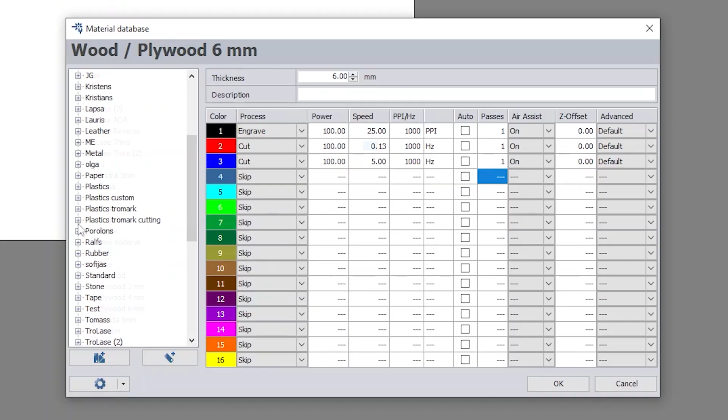If you need to experiment with a specific material, you can go to the Test Profile tab and create a new material template to experiment with the material you wish to. Remember to give it a proper name and a description for what purpose specifically the settings are for.

It's recommended to skip the red cutting color and first only engrave the black and blue colors, because while cutting, the material might warp and ruin your engraving. Later on, you can skip the engraving process and only use the cut option.

But for plexiglass, use the cut line first, then remove the protective film layer from the plexiglass, and then engrave on the exposed plexiglass. Otherwise, you'll be engraving on the protective layer and it will be impossible to remove and ruin your drawing.

When you have selected the order of colors that you wish for, you can press OK and review your job. On the left side, the Calculation tab shows the color order and the estimated cutting time. Click Update to refresh times for your current file.

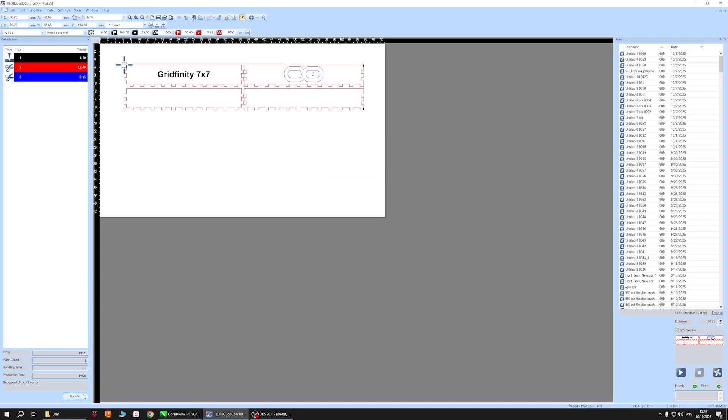Positioning and testing. There are some tools which might come in handy when managing your jobs on the laser plate. They include Rotate Job, for easy job rotation on the spot, and Vector Ordering. Vector ordering is usually used for bigger jobs to optimize the cut paths. Simply press the button and then select Quick Ordering and override Job box.

Then click Start to optimize your vectors, but usually the optimization is negligible. So I suggest using this for bigger jobs, or in cases where the laser goes in random paths and takes a lot of time to travel from each point to the next.

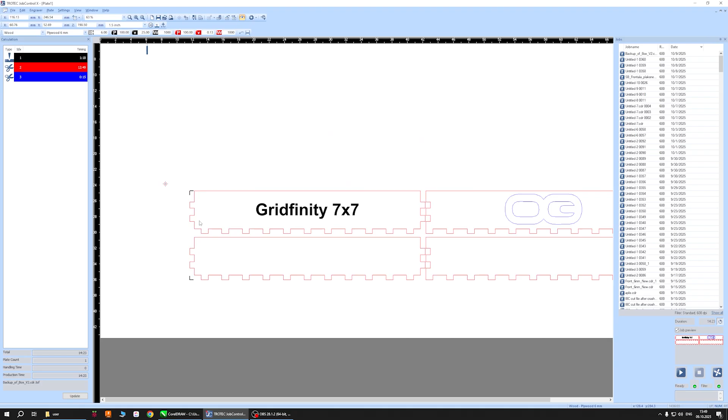There are also marker options for alignment or multi-step jobs, like acrylic engraving in layers. Use this option when you have already cut out a job and want to edit your vector file. Without changing the file size, you'll be able to engrave in the same spot where the job was cut.

If you accidentally double-click on the job, it switches to the full preview, which can be pretty confusing. To exit, simply press the Escape button on your keyboard.

Okay, now we have finally finished editing the file for the laser cutter. Remember to check the dimensions for your file.

So let's see, do we have any scraps of that size? No, that's too much, or that's too little. This one is only like 4. And how about this one? Oh, this is 14, and clean length for the 730. So, whoops, 14 — we can grab this. This will be usable, so we don't have to use the fresh sheets.

Put it into the left topmost corner very carefully, and then check if the material is warped. You can see over here it's a little bit warped. Let's see what happens if we put it on the other side. If you have it warped in the middle, that's very bad, but if it's warped on the sides — over here it's not so bad, only a little bit here you can see it moving.

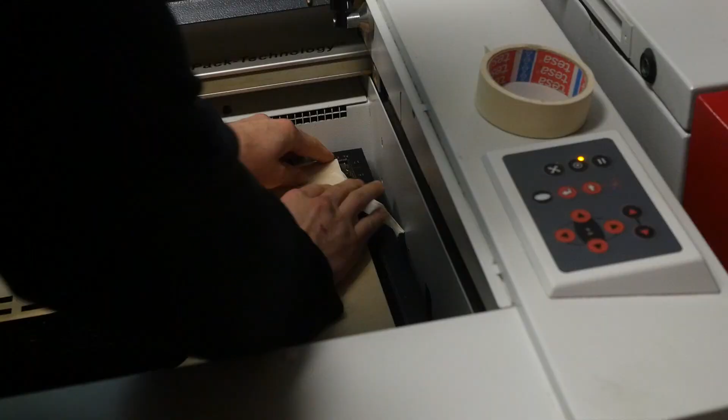If it's warped on the sides, you can fix it with Scotch tape, paper tape. Just tear off a piece and glue it onto the side. Make sure to stick it quite well, and do the same thing on the other side. Make sure it's really taped down, otherwise it will come off.

If you have really warped sheets, like something like this, be really careful. If you manage to glue the corners down, they might just pop off after some time, so be really careful about that — that's why you always watch the laser.

So we've taped down the corners, and if you just tap it you can see — okay, this corner is moving a little bit, but over here it's fine. Now it's calibration time. This is the most important part.

To get a perfect laser cut, to actually cut through the material, you have to calibrate the laser quite well. Wake up the laser, go to the middle of the material with the laser head, where it's most calibrated, and then come here. We have to use the calibration probe that's hidden in here.

This laser has a manual calibration probe, so we have this little calibration probe — let's put it to sleep. If you look at it, you have a fatter part over here and a very thin part up here, and you can see the red nib over here. That's the part where you hold it, and a little square that you have to put into the laser head to calibrate. So carefully put it over here so it stays like that.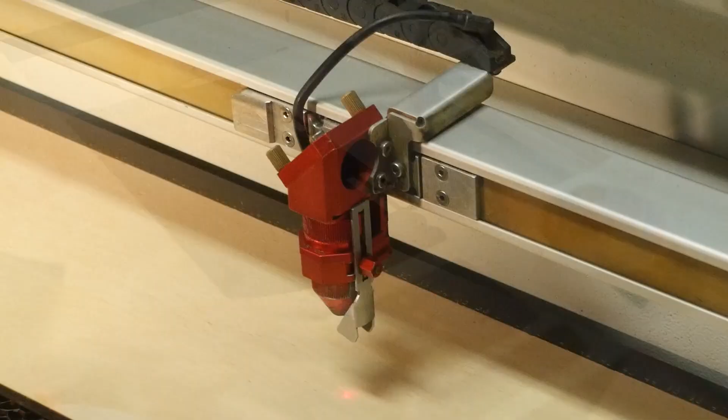And wake up the laser. When you've put it carefully here like this, remember not to put it under this screw, otherwise it will get stuck — make sure it's nicely on the outer end. Of course, if it's on the outer end, it might fall off.

So over here in the middle, just hold the bed button to go up, and when you get near it, release and start tapping a little at a time. So see, it moves in tiny increments until it reaches so far that it falls off more and more — you see it moved and it falls off.

This means it's perfect calibration. If you move it a little bit down, for example, demonstrate that you would be holding it like this. See, it fell down, but I managed to stop it in time. But if we do it again, it might go a little bit more. So I'm holding it and it's fast, but it still moved a little bit too much, so this will be a bad calibration. You have to be really careful. You have to just, when you get close, tap it so you have perfect calibration.

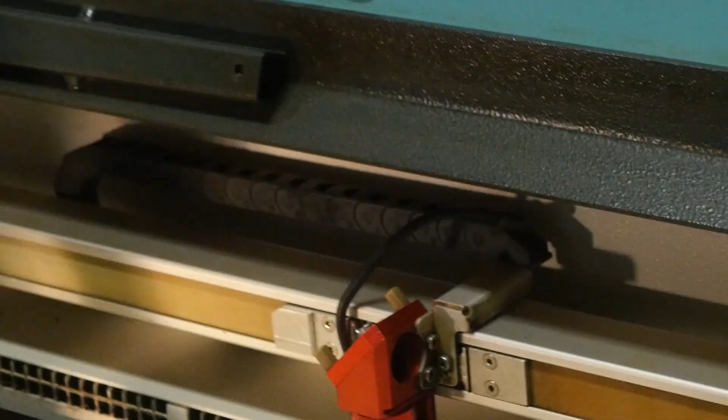So we have to remember that over here is the cut part, this is empty space. We have to watch out for this part. One of the good reasons that we taped it up on the corner is that we know that over here it will be a good area to cut, but it's still recommended to leave the laser over here at the edge of the line so you understand what will be the limit. So I'm going to leave it here.

Now the laser has been put in the right place, and in the program you can see that the current placement is already interfering with the laser head, and we know that under the laser pointer is free space, so we don't have to cut in there. We must make sure that we don't cut in there. So let's move it a little bit upwards and keep a little distance from the corners. Remember, we put the tape there, so let's give it some distance so we do not cut the whole tape.

And if you can see, we have free space over here. It will also be shown in the screen recording. So it's over here, we can turn on the laser and check. Come here. So if we move from here to here, the same thing will also be seen in the program, that above it's very nice and below there is empty space, so we don't accidentally cut it. So it's recommended to go like this from one corner to the other corner and then go up and see if it actually interferes or not. But over here it seems fine.

So now we can actually launch the job. If everything is ready, everything is positioned, everything is checked, all the colors are correct, all the times are updated, and now you know how long it's going to take. It's going to take 9 minutes to cut and engrave these, but it's going to be fine. So we can press the launch button and the filter will automatically turn on.

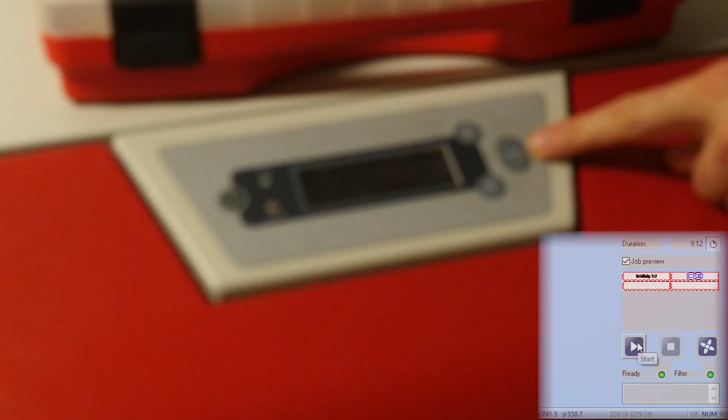Please look at the filter. I'm going to start it in 3, 2, 1. See, it automatically turned on. And currently, let's go here and we can see the engraving process.

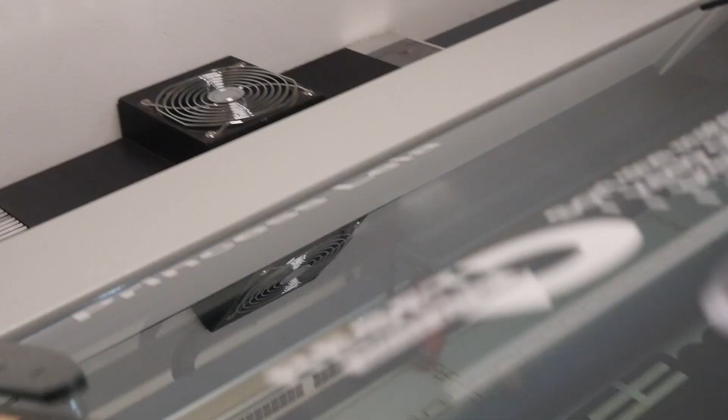It has finished cutting. When the laser cutter has finished cutting, make sure to take the head and put it to home position. And then you can take your parts out. But before that, put the laser to sleep. Then you can take your parts out.

Be careful not to lift the whole bed with the tape, because sometimes it sticks quite well, so carefully unstick it, remove it, then remove your parts if some are stuck, and then discard the pieces that are smaller than 20 by 20 centimeters.

This one goes into trash, this one goes into the treasure.

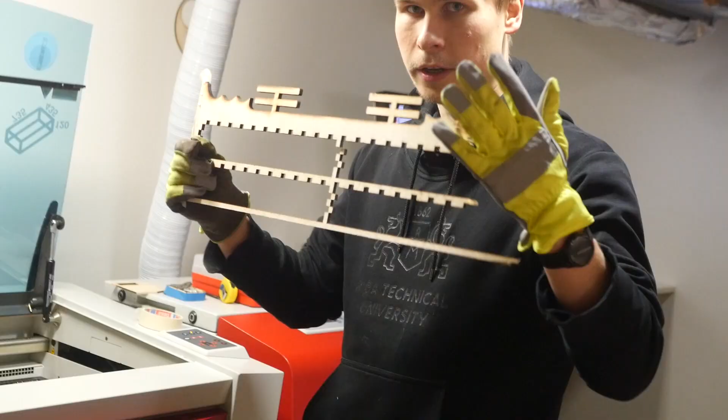To dispose of the scraps, you must break them into smaller pieces. To do that safely, use gloves and safety goggles, because the pieces might fly into the air and into your eyes, and these things are pointy and sharp. So use gloves, safety goggles, break them into smaller pieces, and then they can be discarded into the trash can. This one is for scraps and materials. It's written here.

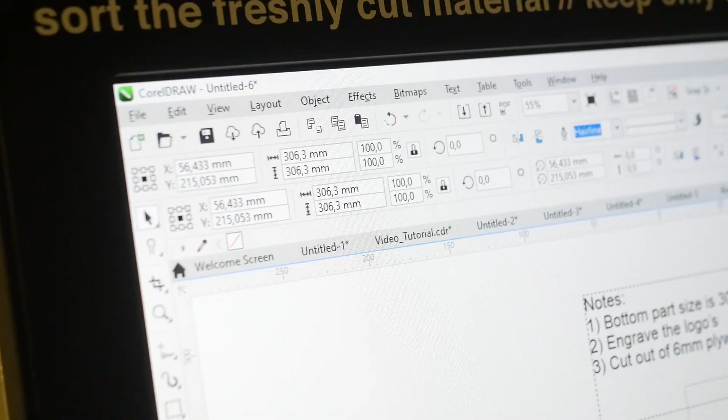Again, take the measurements from CorelDraw. 306 millimeters, a little point there. Let's find something that size.

Since we were using 6mm settings and they cut perfectly and the calibration was also fine, we don't really have to recalibrate. If we want to, we can, but in this case, let's leave it.

Since we already set the settings into CorelDraw before in the print menu, we don't have to reset them again. We can just select our part, select selection, press print, and all the settings should be saved.

Then in CorelDraw, in JobControl, we press the old file, can press backspace to delete it, and drag in our new file. Again, remember we have put a little bit of tape there.

Let's leave some edge. Let's update it and check it with the eye. Everything seems fine. We don't have to check if it fits or not because it's a full sheet.

If you see the laser cutter filling up with smoke like this, and it's not getting properly sucked, that means the filter is clogged. But before you panic, you can press the pause button and pause the cutting, and it will slowly take all the smoke out.

Do not lift the lid. If you lift the lid, all the smoke will go out. So let it recirculate. When the smoke has disappeared, you can continue cutting your job, but tell the lab's manager that the filter has to be replaced or the settings on the filter are bad.

In this case, come here, we specially put the filter speed very slow and it is not sucking anything. So back to 100 and it will be fine.

The big piece has also finished, but it kind of is in the same place, it doesn't come out. In this case, 6mm plywood can have branches and stuff.

You can see some bigger branches are removed and replaced by a false oval of wood. But in this case, if you look at the other side, there are some small places where it hasn't cut. If it's not severe, you can try to break it out. If it's severe, then you have to re-laser it.

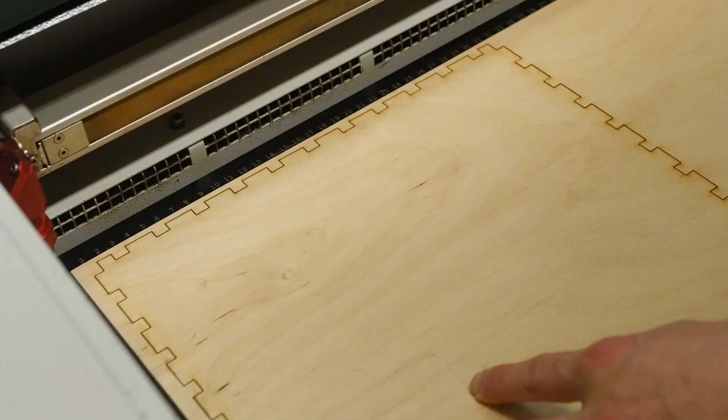If you have actually placed it correctly into the corner like this, you can make sure that you can re-laser that. If it's somewhere else, you will never place it in the same spot. But if you place it in the corner always in the same way, you can try to re-laser it.

But if you re-laser, the marks will get quite bad and there might be a lot of reflection from the bottom of the laser, so it might get very nasty. In this case, you can see everything has mostly cut out. The small things can be cut out with a knife, or in this case, you can just do it like this.

If you take a look over here, this part is also coming out quite nicely, but these ones are not quite nice. As you can see, I pushed it from the correct side, because if I would have pushed it from the other side, all of these scrap pieces would have broken over here. But in this case, they stayed in the same place, so nothing is going to be damaged on this piece of wood.

So let's get cutters and let's cut it correctly. Be careful with sharp things, do not cut yourself, and just see where the line went, or look in the program, and then take the cutter and cut it in about the direction that it came from, like this.

Make sure that the offcuts go into the scrap piece that is left over, like this, like that, a little bit more. Over here seems fine, you can barely see the line over here, so let's cut it like here. You can see this line, so I'm going to cut it like this. A little bit more, same here.